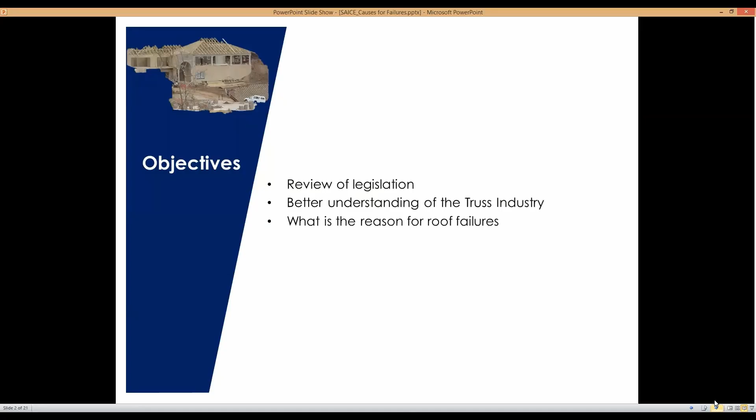So let's just take a look at the objectives that we want to achieve for today. In the first place, quickly a review on the legislation. Secondly, a better understanding of the truss industry. Thirdly, what is the reason for roof failures? Then how to prevent these roof failures. And what is the involvement of SAICE to help preventing these roof failures?

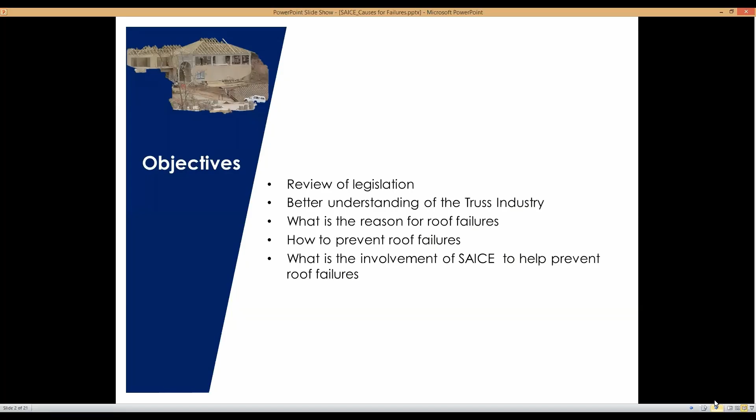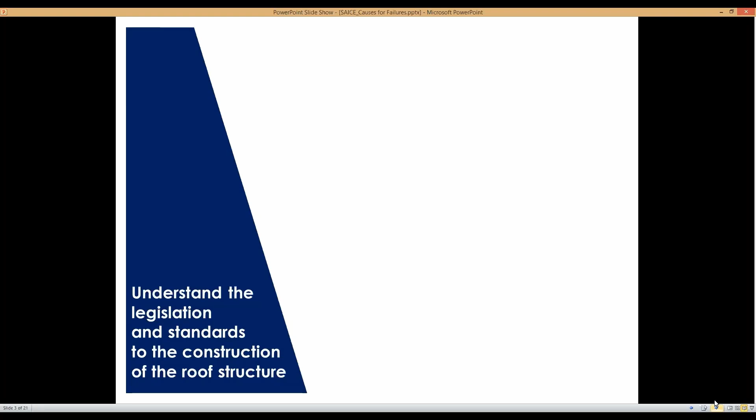Okay, so let's talk a little bit about the legislation. We all know the purpose of legislation is to protect the home builder and to promote uniformity relating to the erection of buildings, and we need to apply it. Really, it's to the benefit of the end user, the person that spent the money. That is to help him and to keep it that he receives a structure, a safe structure, at the end of the day.

So let's first take a look at the first legislation from the Building Act. Any residential house to be built in an area under the jurisdiction of a local authority falls within the scope of the National Building Regulation and the Building Standard Act, and the regulations made in terms of that act. So, in short, if you fall in a municipality area, you need to comply with this regulation, the National Building Regulation.

If it's a homeowner, we all know that in terms of the Housing Consumer Protection Measure Act, all home builders must register with the NHBRC, and all new homes must be enrolled at least 15 days prior to construction. So that's for a residential house.

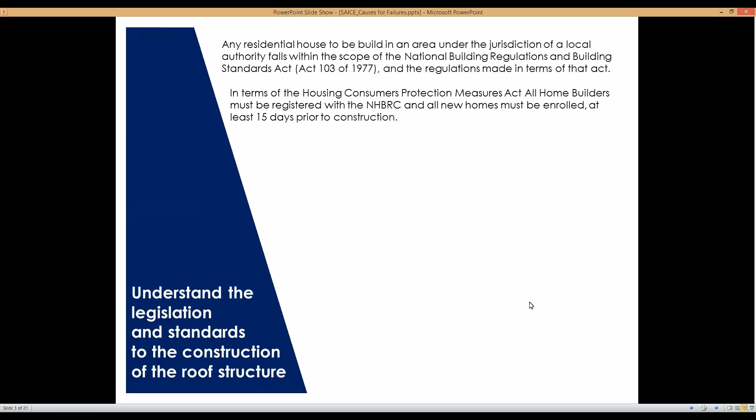The next one that most people overlook, and it's very important, is the Occupational Health and Safety Act, the 2014 construction regulation. This helps because you cannot build a structure and never maintain it. Somebody needs to make sure about it. There's really a rule that you need to comply with the construction regulation.

Many people differ from me, but I did find out and investigate this - the National Regulator for Compulsory Specifications, Rudolf Opperman, did confirm that we need to comply, all structures need to comply. It's not only public buildings that need to comply with this, and not only at the time of construction - it's all over.

If you read through it: inspection of that structure is carried out periodically by a competent person in order to render the structure safe for continued use. B - the inspections contemplated in paragraph A are carried out at least once every 6 months for the first 2 years, and thereafter yearly.

Number 3 - the structure is maintained in such a manner that it remains safe for continued use. And lastly, records of inspections and maintenance are kept and made available on request to an inspector. So if anything happened in that structure and the health and safety guy asks you for these registers, you need to have it at hand.

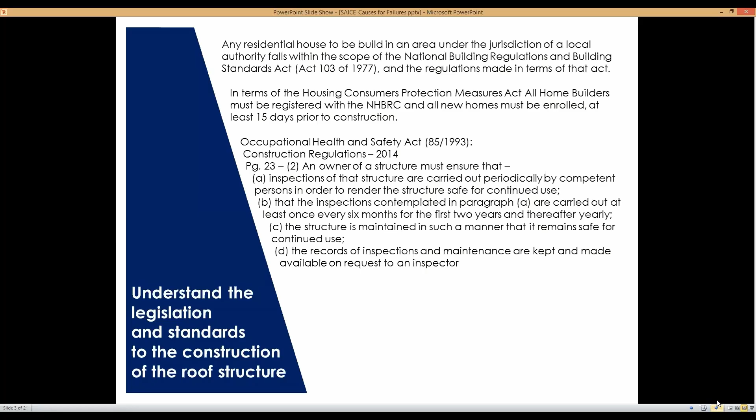Very few people are using this, and this is to help the end user so that the structure stays stable and safe. Let's take a look at the people that regulate and control this.

In the first place, it's your A19 inspection. We now change the focus to the roof structure, and this is why I'm going to refer to roof structures from now on. Your A19 inspections - you need to have an appointed professional person that does these inspections of the roof construction after it's erected.

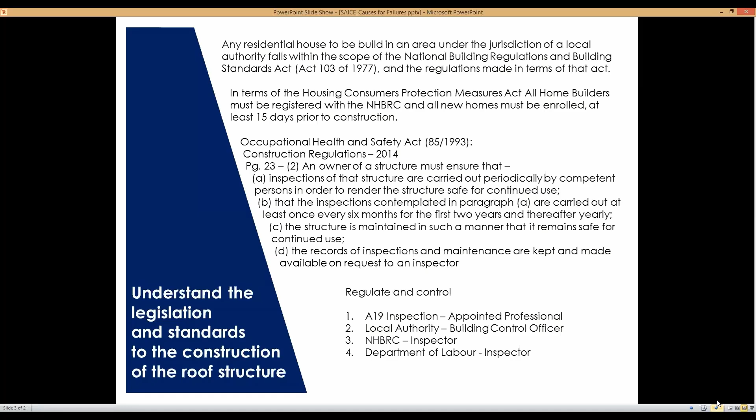Then we go to the local authority. The building control officer has a duty that in his jurisdiction he takes control. Then we go to the NHBRC inspector, and he also has a duty he needs to comply with. Lastly, the Department of Labor inspectors - these guys can get out to your place at any time, specifically your public buildings, and they can ask questions regarding these records.

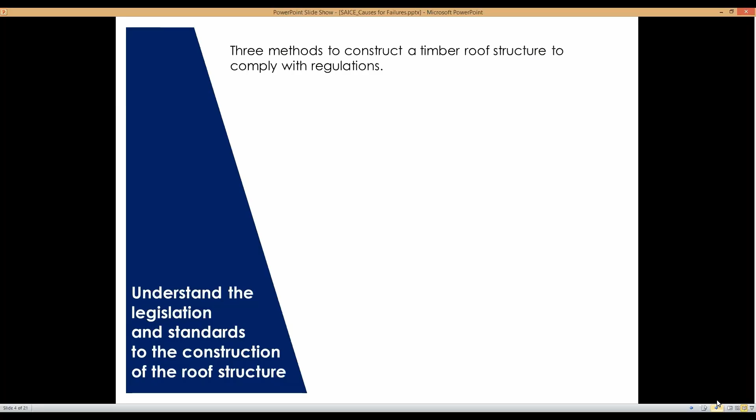Let's take a look - the reason I cover this part is very few people, specifically in our industry, are aware of this. If you want to comply with the building regulation, you only have 3 methods to build a roof structure. It's actually 4, but one is nearly the same as the other. A rational design, or a rational assessment.

If you look in Part A of your National Building Regulation, SANS 10400, they will explain exactly what a rational design is, where you comply to it, and what you do about the rational design. The next one you can use to construct roof structures is the deemed to satisfy in Part L. You've got Table 9 there, and Table 9 will guide you - we'll talk a little more on it later. Lastly is your Agrément certification.

So if you want to construct a roof structure in a municipality area - and many people say, yeah, but a farm or small holding is not part of it - as soon as you start paying taxes, you are part of that municipality and you need to comply with the national building regulation in that area.

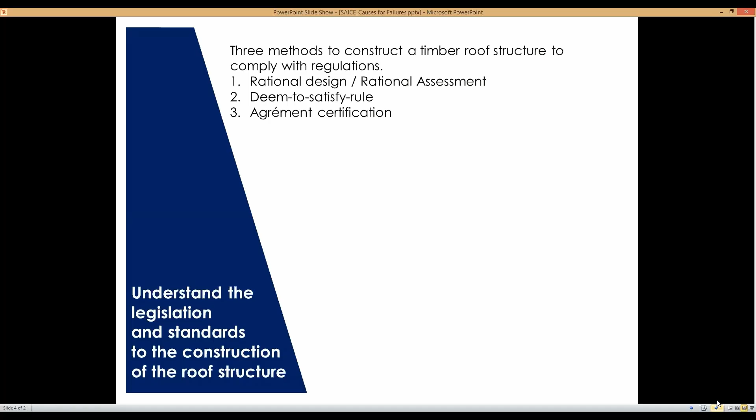Let's take a look at the first one, the rational design. I include two pictures here - one is a prefabricated truss and the other is a hammer beam truss for a post and beam. Both of them are a rational design. Many people are under the impression that only nail-plated trusses, co-planar trusses, are a rational design. But you can design anything - you can design site manufactured trusses, also a rational design.

So you're going to design all the connections, but mainly if we refer to a rational design, we refer to prefabricated trusses by the systems. Okay, let me just quickly take a look, just to give you guys an indication.

If you're not familiar with how the truss industry works, at the moment we've got 3 systems in South Africa. If I refer to a system, I'm talking about a supplier of design software and everything that goes with it - the nail plates they design, the connections, all of that is supplied by that system. They oversee that whole industry in the sense that they train the designers and make sure they follow all the rules. So it's a well-regulated industry. The 3 systems we have at the moment are Unilam, MiTek, and ITS.

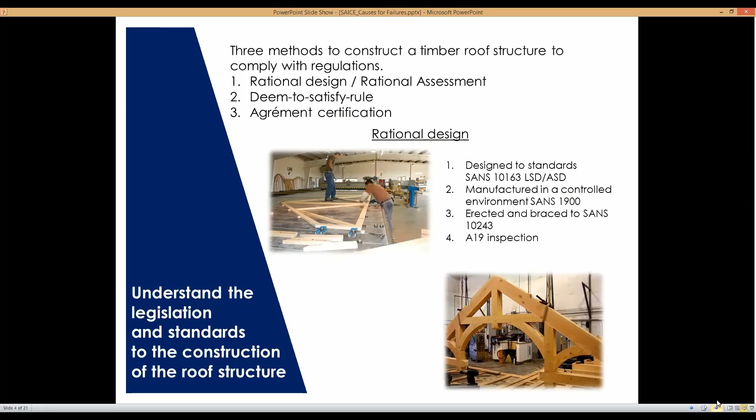So this is the first one we're going to discuss, the rational design. Then we go over to the deemed-to-satisfy rule. This is for self-manufactured trusses, and these trusses are manufactured according to SANS 10400 Part L, Table 9.

The limitations are a lot here. You cannot design a girder - it's a maximum span of 8 meters. There's a specific truss configuration you need to follow, a specific connection detail at all the members. It's a Howe configuration, and they've got a Howe configuration for each of these span differences. So your limitation is 8 meters maximum span, only gable to gable - no hips, no valleys, no girders, nothing.

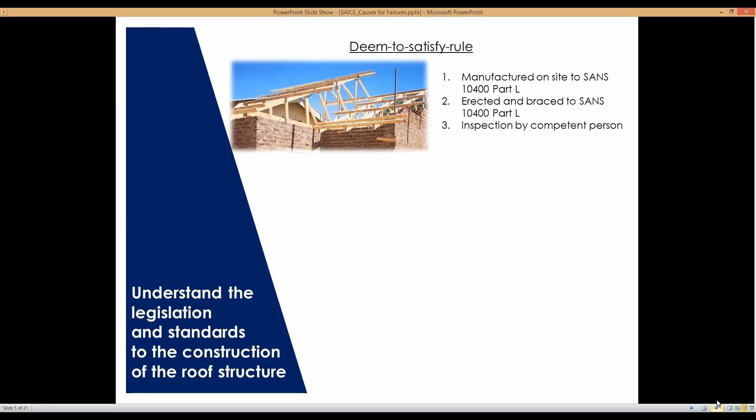At the end of the day, it needs to be inspected by a competent person. So that's your second option for how you can manufacture these trusses. And lastly, you can go to Agrément certification.

This is a certificate that confirms fitness for purpose of a non-standardized product. What I'm using here is the CMA truss, the Concrete Manufacturers Association truss. It's a truss developed specifically for Category 1 buildings. If you look at the detail of this truss and try to rationally design it through the standards, it will not pass. It's been tested by CSIR, and it's specifically designed for Category 1 buildings.

Your deflection limitations are not the same as the others - just a simple example, the deflection. For this truss, all the members in the Fink configuration are 38 by 76s, spaced at 900 spacing, and your battens are 38 by 38, or let's say 36 by 36. Now everybody in the truss industry knows that for a tile roof you cannot space at 900. You can with Saligna, but with pine you cannot, because you're going to get a deflection problem and also a bending strength problem with that spacing.

But for them, it was tested and accepted by the industry, and we all know it's for the RDPs and so on. So it's very strict, also in this design that's controlled. It's not just a matter of manufacturing that truss - there needs to be a specific plate size on it, all the materials, and then you can use it. That's your Agrément certification. You get it a lot on other products too, like your JoJo tanks and all of that.

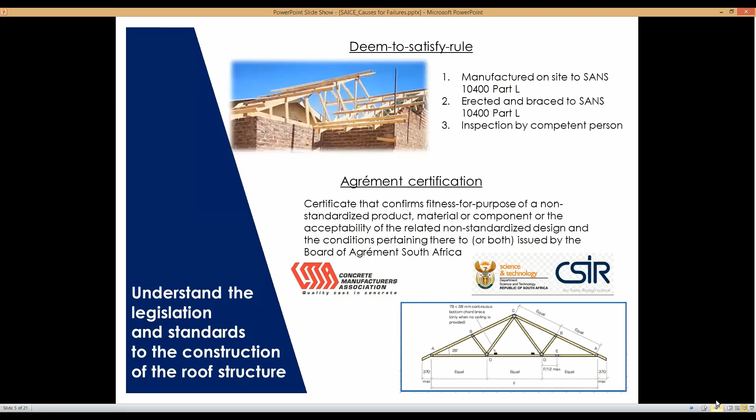Okay, so those are the three ways that you can actually manufacture a truss. That gives us a bit of background if we refer to trusses in the industry.

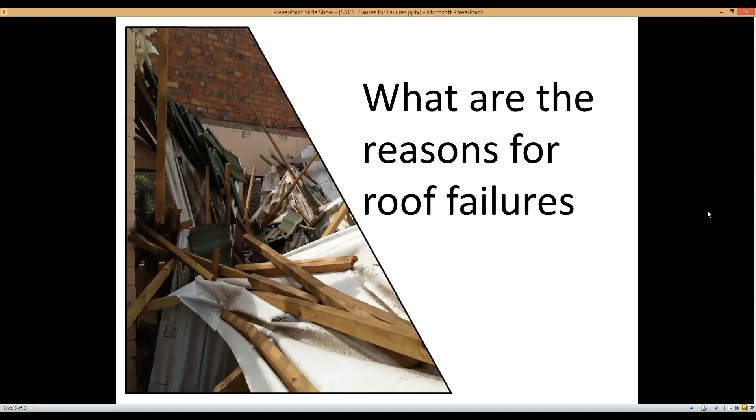Okay, now we go to the next part. What are the reasons for roof failures? We're just going to discuss this generally. We can go in depth, but this is just my view, along with independent roof inspectors who work with me, and we've been in this industry for many years.

The main reason is the application of building regulations and standards. People don't use them. Here I'm referring to professionals, and it's not finger-pointing, but if you decide to start signing for roof structures or design, you need a good understanding of all the standards. You cannot go into this industry otherwise. Unfortunately we have people who sell signatures - I don't like saying this, but that's what happens. They sign and give you a certificate of compliance for R1,000, and they've got no idea. A lot of these assessments show a professional did sign for it, but it's totally undesigned and incorrectly erected on site.

So sometimes I ask myself, did anybody inspect this structure? You're welcome in this industry, but you need to understand all the standards, and work with a truss manufacturer to get background. You need to work with the ITC. There are a lot of sources, but do yourself a favor - don't try signing for timber roof structures if you haven't got an idea how it works.

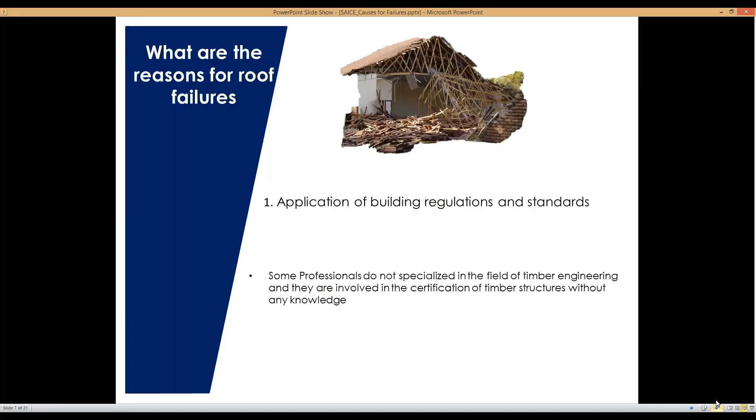Okay, let's go to the next one. Many building departments at local authorities and NHBRC offices are dysfunctional. I don't like saying this either, but it's reality. Specifically in the countryside, in these small villages, the building control officers have no idea about roof trusses. If you put a query through to NHBRC officers, they just say it's job creation. That's not the way it's supposed to be according to all these legislations.

Then we go to the ignorance of the home builder. Unfortunately these people don't get informed by the architect about their responsibility regarding maintenance and maintenance inspections. So they've got no idea - they just accept the builder. If he says it costs this much and the price sounds right, they just use the guy without any background knowledge. That's the kind of experience we get in the countryside. In the metros it's a bit different, but there's also a lack of control at this stage.

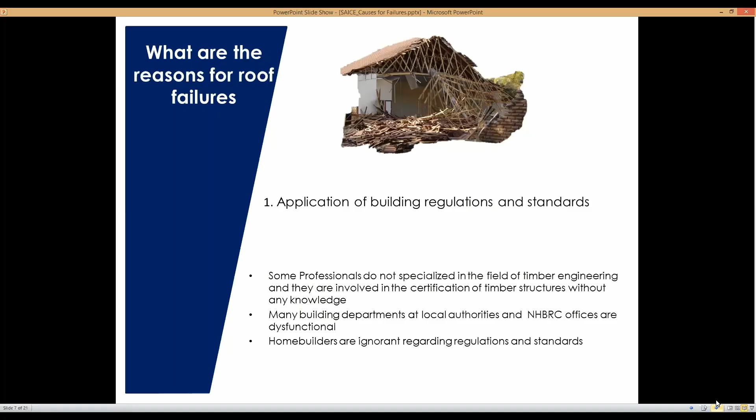That's just my feeling. The next one is a lack of strength in the design - insufficient bracing to secure lateral stability and member stiffness. You can see in these two pictures I include here, it's the same roof - one inside the vault, and the other showing two spans, left side and right side the same span, then the center part where the span increases. You can see one side of the roof structure has nice straight lines, properly braced, while on the other side where the span increases, there's a huge bracing problem.

The main thing we all know is the bracing function is to keep the truss vertical, and most importantly to give lateral stability for your compression members. You can see the lateral deflection on those trusses as we measured was over 300 millimeters, so it's quite a lot. The next thing is your plates will actually pull out of the connections, and then the roof will start to fail.

You can see also at the bottom part where your axial forces are more near your heel. Look at the S shape there and the lateral bending there. It's purely because of bracing.

But keep in mind that the bracing rules for the deemed to satisfied is only up to 8 meters. So if you don't have SANS 10243, please don't sign for anything more than 8 meters, like the Rational Design trusses. A lot of the professionals just accept the plans as is. You need to have knowledge of bracing if you start signing for roof structures. You need to design the bracing yourself without any assistance from the plans.

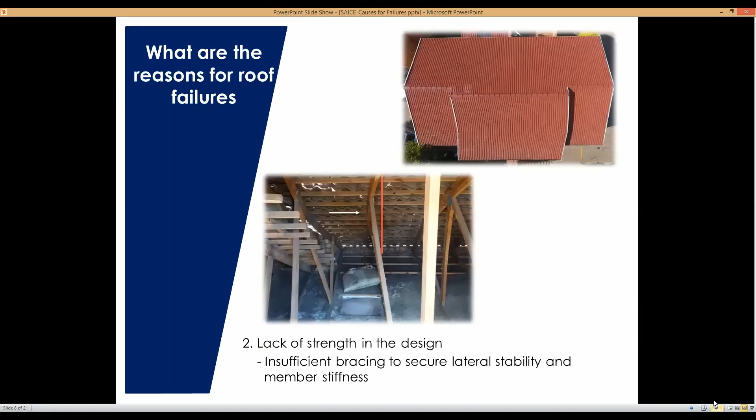I did include 3 slides here for wind uplift. This is a lack of strength in the design, insufficient design strength with respect to environmental actions, in this case wind. You will see on this structure, it's only a part of the structure where the tiles are not on, and the main reason is underlay. It was an extension to a structure, and that part of the structure, the wind blew off the tiles.

Now, the reason why I include this part is very few people understand really what is the function of underlay. The membrane performs a critical function in preventing concrete roof tiles from being uplifted under high wind gust. It virtually eliminates the load on the concrete roof tile when experiencing an imposed uniform pressure difference between the internal roof space and the outside. So in short, the underlay keeps the pressure above the tile and underneath the tile the same, not inside the vault, because that's underneath the underlay. So that's the first function - to keep that pressure the same.

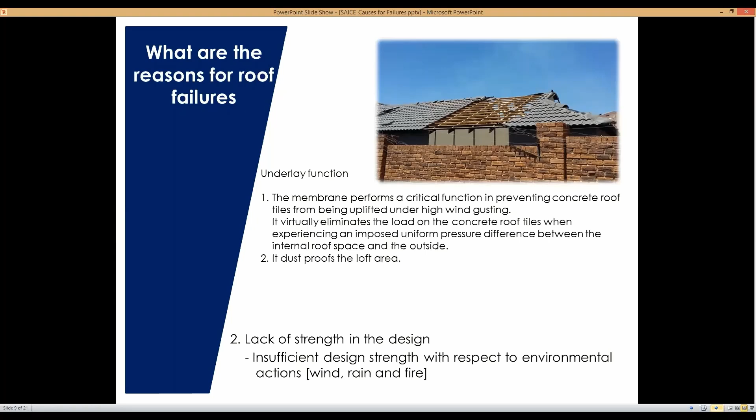Secondly, it dust-proofs the loft area, so you don't get that dust later on the ceiling and on the side of the ceiling, going through the walls and so on. Thirdly, it prevents your condensation runoff - that's another function. And then the last one: suitable for any pitch roof, especially roof applications in hot climate conditions, as it stabilizes UV and heat.

Now, is it compulsory? Yes, it is compulsory. If you look at your supplier, it will tell you it's a requirement for a tile roof between a pitch of 17.5 and 26 degrees, and above 45 degrees. But from experience, I would rather advise you to use it on all pitches - the cost involved is not so much, but the benefit is huge. So this is the first slide, to do with wind and wind forces.

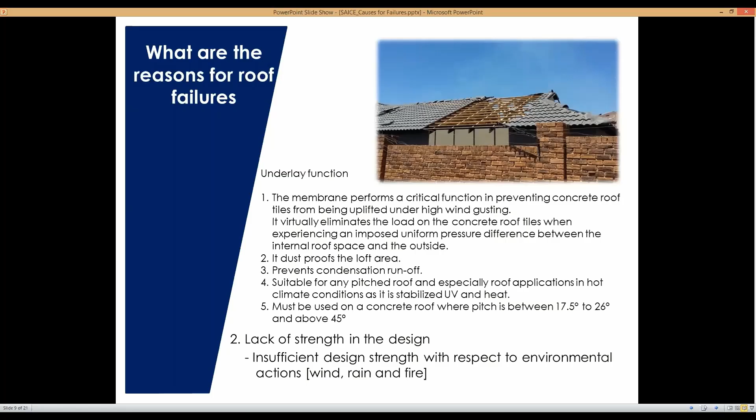The next one - why include this one - is just to show you people that if you look at the picture itself, there's a lot of loose tiles, purely because of wind forces here. There was underlay, but it was a huge wind force, and this is why if you comply to the technical detail of the tile supplier, you will see they've got technical advice on this. Very, very few contractors do this, but it's a requirement.

Only category A, where it's an unexposed area, needs 2 courses and the overhang must be nailed. If you go to category B, semi-exposed, it's 5 courses and the overhang - you can see also in those lines there. In your category C, that's your exposed area, fix all the tiles.

This happened very few times, and this is what I actually want to say: if you are the appointed professional for the job, make sure that you get all this information and make sure that the contractor complies to it. Otherwise, you cannot give that guarantee.

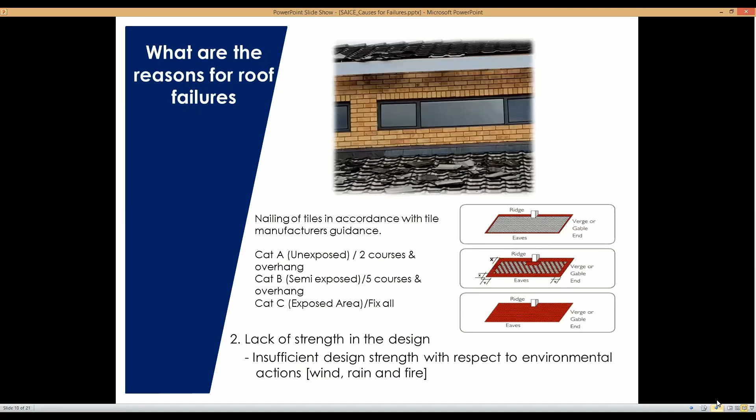Then we go to the last one I want to deal with. The whole roof structure, after the weekend, the wind just uplifted the whole structure with the holding downs and put it next to the building for us. This was purely nothing wrong with the holding down itself; they did use the correct holding down. But the contractor did not close the gables as required, and because he wanted the structure finished as quickly as possible, they left it open for the weekend. A day later, the whole roof was blown off and on the ground.

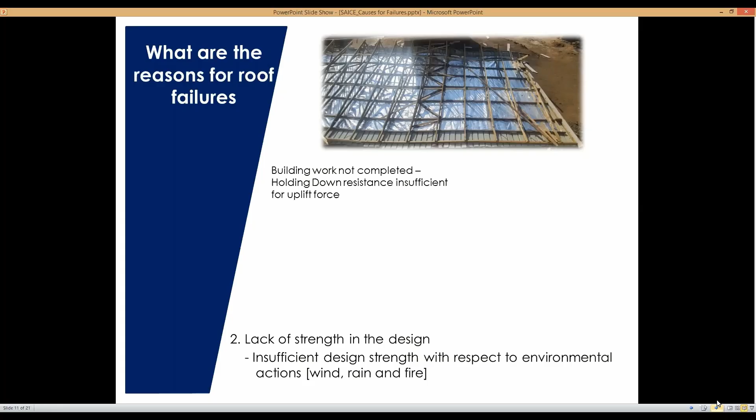Just to give a bit of perspective about a sheeted roof versus a tile roof: if you talk about a tile roof, remember it's a heavy load. We normally refer to it as a bag of cement every square meter above your head, which gives a good indication since the guys know the weight of a bag of cement. As soon as you deal with a sheeted roof, you work with an umbrella effect, so you need to keep it tied to the superstructure the whole time, and that's why your holding downs need to be done properly.

Please be aware that you cannot use wire for a sheeted roof. In Part K, it's nicely explained what thickness of holding down you need to use, how deep into the superstructure you need to bind it, and all of that. So please, always remember your inspector cannot inspect the holding down for you. You will say, yeah, it's incorrect.

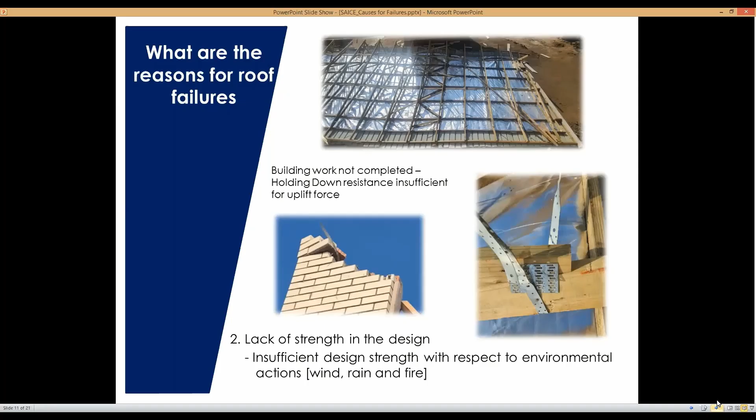Let's say, for instance, they did use wire for a sheeted roof. The inspector will say to you it's the incorrect one. But still, if you look at this certification, we said clearly that we don't take responsibility for the holding down because we haven't got laser eyes to look inside the superstructure. So that is the responsibility of the appointed engineer for the project.

Then we go to the next two — this is the bad stuff. At the stage that the roof inspector or the appointed engineer does the roof inspection, there's no loading on it yet. It's just a structure with all the battens, all the purlins, with the bracing 100% correct.

And he gives approval, and then they start loading the roof. So he's no longer involved, and you don't know where they're going to place the solar geysers or the PV panels or all of that. Just keep in mind, the appointed engineer needs to make sure that if it was not specified exactly where they're going to place the solar geyser on the architect's drawing, those trusses still need to be designed to take that load.

The main thing to keep in mind, people, is this is reality, not only due to Eskom's performance. If you read SANS 204, it specifies that only 50% of your water heating supply can be from electricity — the other 50% needs to be from solar, gas, heat pumps, or another way. So just keep in mind that solar units are the reality; they're going to be on all the structures.

The big problem here, from my side, is that these solar suppliers just put it on the roofs of old structures without checking. Some of this stuff is heavy — we talk about 400 kilograms over 3 or 4 trusses. If you apply that load to those trusses afterward and reanalyze it, you'll see it's totally under-designed. So you need to make a plan there afterwards, but that only happens after the fact.

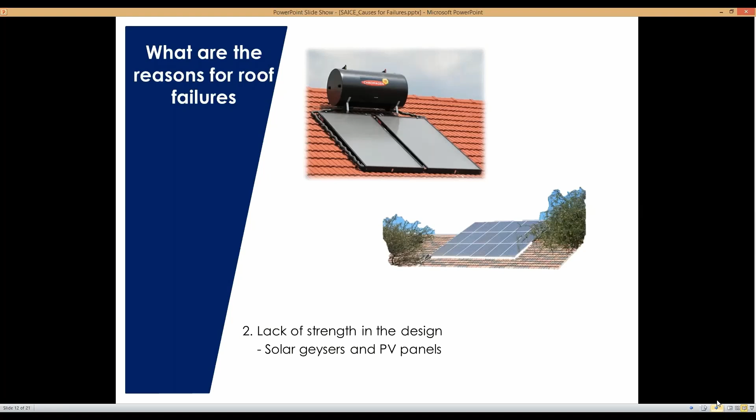Another reason for failures is a lack of strength in the design of self-manufactured trusses. If you refer to a prefabricated truss or deemed-to-satisfy truss in accordance with SANS 10400 part L table 9, it's only an 8-meter span, no girders, no hips, nothing like that. They specify the pitch, the span, the truss spacing, truss configuration, and method of connections.

All of that is specified there, and you need to adhere strictly to it. Then it's acceptable. But in this case, this is exactly what I'm talking about in the countryside. This is one in our small village that I did, that Pyman helped me with. The NHBRC just let this happen. You can see there's no triangulation in the trusses. Look at the deflection, and they load specific areas of it. You'll see on another picture at the end where I show you how the structure looks from the outside.

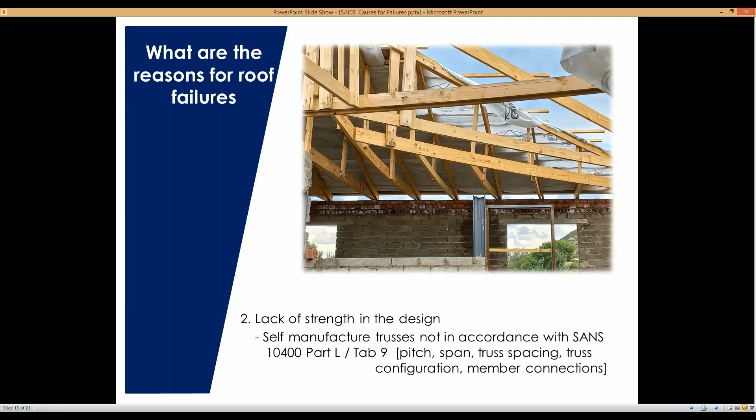It's actually a nightmare if you see stuff like this, because it's like a timing bomb that just waits for something to happen. And then you need to convince people staying inside it that it's just going to collapse totally and fall on your head and you're going to die. But this is our problem that we have due to municipalities that don't do their jobs.

Okay, mistakes during the truss fabrication stage later have an influence on the stability of the truss. People make a mistake with the timber size and the grade. It's not a big influence, but if you talk about girders with prefabricated trusses, they used maybe a grade 5 instead of a grade 7. They overlook that part.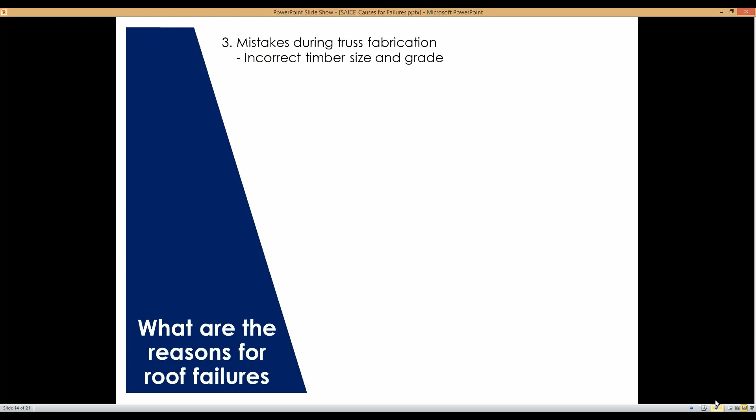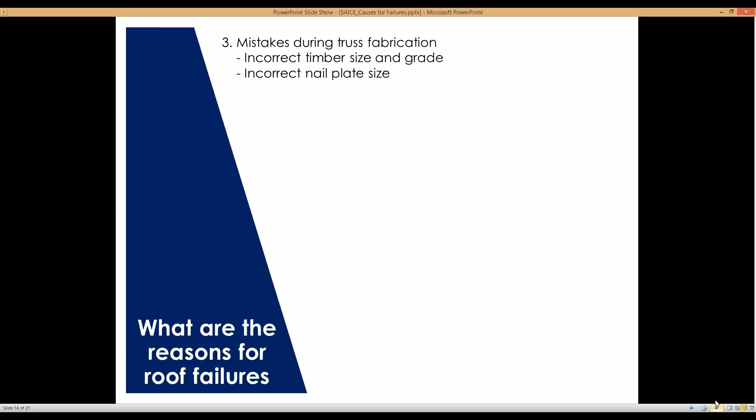And then the next one, they use incorrect plate sizes. Maybe they did not have it in stock, and somewhere it slips through the control measures. So it can happen that you get to site where there's only a plate on one side, or two small plates, so it cannot transfer those axial forces and that bending through that area.

Then we go to the next part, truss configuration and connection details of self-manufactured trusses. It's like that previous picture I showed you, people. We have problems with it. People don't adhere to the regulation of deemed-to-satisfy, and they just build what they like. We really have a problem across the country about this, because you go to the municipalities, you go to the NHBRC, and the NHBRC just tells you it's job creation. That's not their duty, just to give job creation. They're 100% allowed to do that, but according to the legislation.

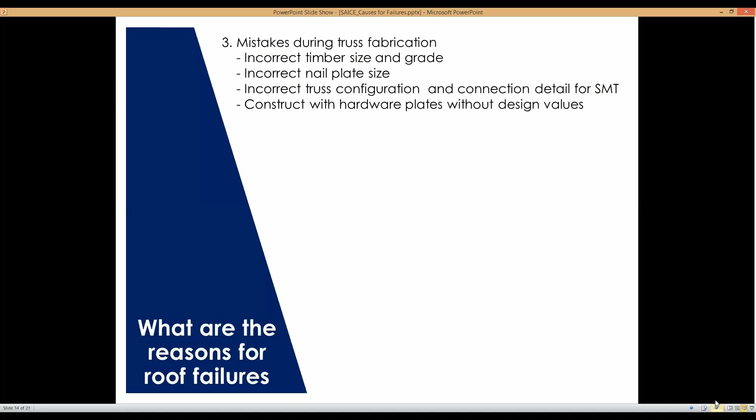Oh, this is the bad one. Constructed with hardware plates with no design values. From my side, I wonder why they ever allow a nail plate in hardware stores, because there's no design values to it. So what the contractor does, he just goes there, buys the reasonable priced plate, and he just nails it. You can see on those plates there, it's only on one side.

I can show you some pictures here, and I can show you some roofs that came down due to these hardware plates. This is why, to be honest with you, I cannot believe they sell this stuff in hardware stores, because it's like selling a nail that can't do the job. These people buy anything just to manufacture a coplanar truss, but it's totally under-designed. It's just a mess, to be honest with you.

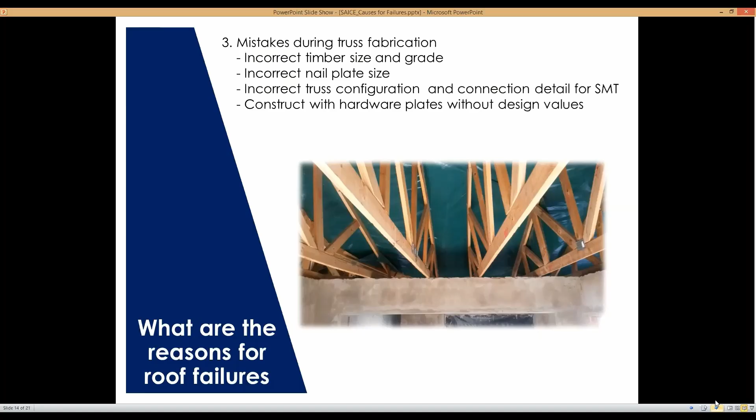Okay, what are the reasons for failures? Now let's take a look at mistakes during the construction phase. You can see in this picture, the other one was on the inside. Can you see here, the superstructure already failed. They tried to prop it and rectify it, but it's a nightmare. It's in our small village, the pitch is too low. Everything that's wrong is in this structure on the inside.

Okay, insufficient construction drawings. Here we go to the prefabricated trusses and contractors that haven't got all the drawings that they're supposed to have on site, so the brace bays is not constructed in the correct place.

They did not use internal supports, or they did use internal supports where they're not supposed to. Then later on, some members start failing because the whole configuration is wrong. Members that are supposed to be in tension, according to the design, are now all of a sudden in compression, without some lateral stability.

So this is also a reason. Then your hip connections and your bracing details are not on site, so you get an end result that's not correct. If you're the appointed professional or roof inspector who's supposed to sign off on that, and you don't get all this information, you need to make the contractor aware of it and make sure they comply. They must construct it exactly according to design, with all the brace bays at the specific place, because that's how the design complied to the standards.

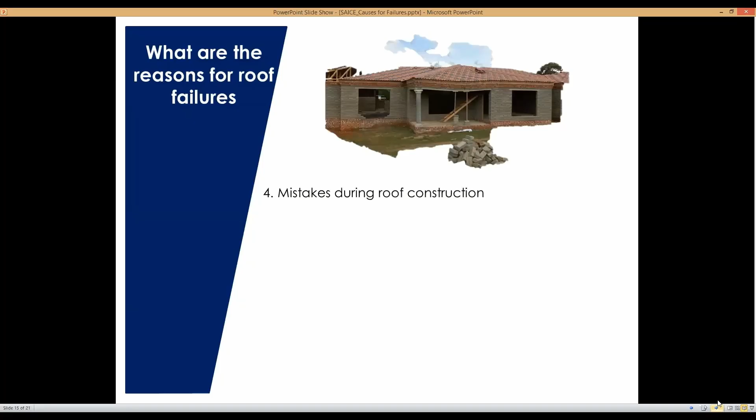As I say, this is exactly the same building from the outside, and we're going to discuss mistakes during the roof construction stage. In the first place, as we said earlier - maybe you didn't hear it - it's insufficient construction drawings that people receive on site, so the contractor or roof erector uses a lot of his own skill to do it.

The danger is that brace bays need to be exactly in a specific place, because that's an assumption that the software uses for the design of these trusses. Sometimes people use internal supports where they're not supposed to, and then your configuration, or the forces through your members, change totally.

Then you get issues with your hip connections and bracing details - insufficient construction drawings on site. Sometimes it happens that people did not deliver it, or somebody didn't give it to the roof erector. So we just need to make sure about that, but sometimes it can be a reason.

Okay, roof erectors do not understand the roof layout drawings. This is why I say roof manufacturers need to spend time with the local roof erectors and advise them. If you see a site where they're busy specifically with trusses that you supply, spend time with the roof erector and guide them, because many times the roof fails due to incorrect construction methods or incorrect placement of bracing.

So that can happen. Then we go to poor principles during construction with unskilled labor. Unfortunately we have a labor problem in our country - a lot of them are unskilled, these people just try to survive and get a bit of money, so they buy themselves a saw and a level and start constructing roof trusses. We need to guide them and use the opportunity to make an upliftment, to get skilled labor at the end of the day.

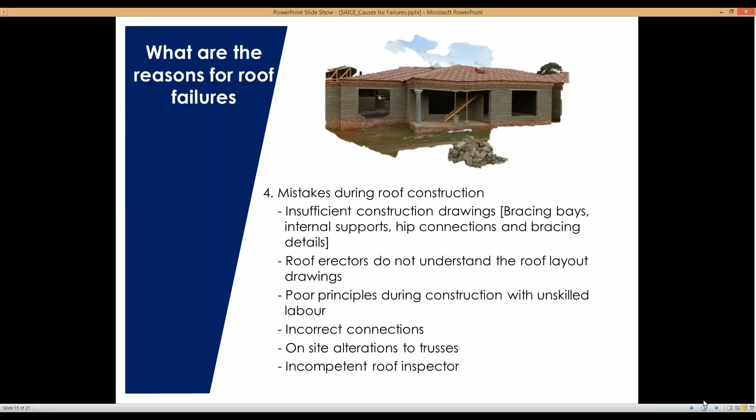The next thing is material failure and connection failure. Then there's roof leakages, specifically on these old houses with sheeted roofs where the lead screws nailed in with lead washers are no longer working. There's no maintenance, and as soon as you get into the roof, due to a lot of leakages inside, you discover that nearly all the purlins are rotten. After the rotting of the purlins, it's going to be the rafters next, and at the end of the day we're going to replace the roof structure. The main reason the roof structure is still standing is that the sheets are 0.8 millimeter thick and can stand on their own. You don't even need that; if the walls can uphold that horizontal force, it will stay there forever.

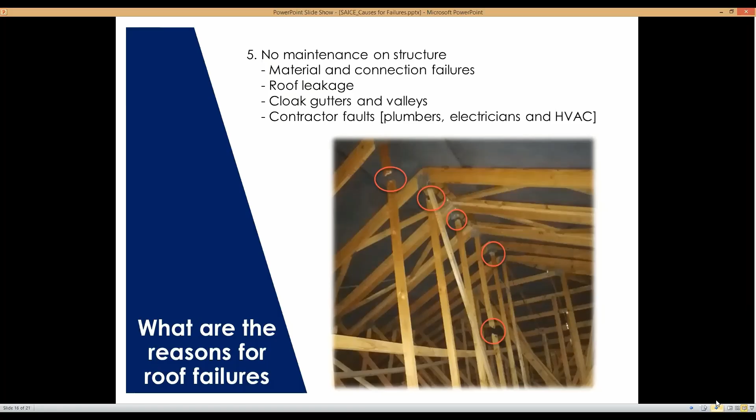If we were aware of it, we can rectify it. But if you only start seeing it afterwards, when you get that deflection in the roof from the outside, it's already gone so far that you cannot rectify the problem with remedials. So how do we prevent these roof failures? In the first place, good cooperation between the municipalities, NHBRC, and the Department of Labor, and the application of the building regulations. That's the main important thing.

Sorry, I'm just going back to this point. Remember, people that work for these departments are liable. So we need to keep them liable, because unfortunately, the building industry gets a bad name due to the way these people are conducting their jobs. So we need to make sure that you keep them liable for that.

Then we go to the architects, who need to educate homeowners on the application of the building regulations and the maintenance of the structure to secure a safe building. Sometimes the architect doesn't need to appoint an engineer. Everything regarding the construction and the structure falls under deemed-to-satisfy rules. So it's not a rational design - maybe it's just an 8-meter span, gable to gable, and the soil is such that you can use the codes to design the foundation. So there's no engineer involved.

So the architect's got a huge responsibility to inform the owner regarding maintenance and all of that. So if we have the opportunity, of course, we need to do it. And you also need to supply not just registration, but a maintenance guidance.

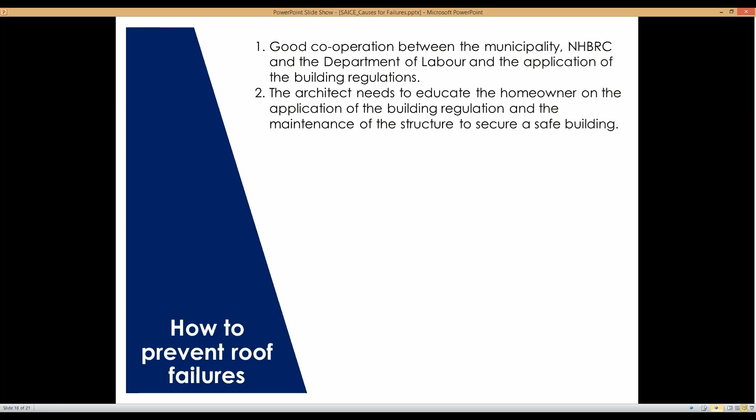Just a small example: when you get to places and the person's got a Chromadek structure, they say, oh, I don't have a problem, I've got a 15-year guarantee. And I said to the person, you're supposed to read through all the technical documentation - you're supposed to wash these Chromadek roofs once a year. Are you aware of it? Otherwise, you're going to lose your guarantee. And the guy said, oh sure, I was not aware of it. But I'm just telling you all this - you need to comply with the technical guidance of the supplier to keep your guarantee.

The next one: workshops on the design and construction of timber roof trusses need to be promoted to professionals, inspectors, and builders. And then the tertiary training institutions should include the design and construction of wooden trusses in their syllabus for timber engineering.

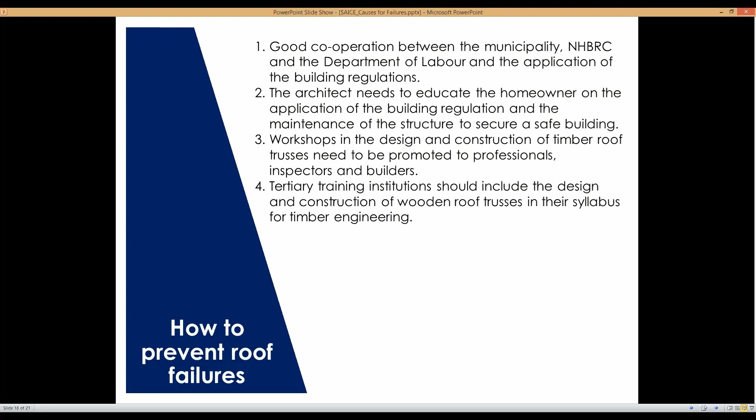I know a lot of these tertiary institutions teach you how to design a joist, for instance, and I know Prof. Walter Birdsey has a passion for this industry and is still involved at Unilam. I know he spends time with his students there, but I feel we need to go a step further in explaining to the students and guiding them through a part of the syllabus on roof structure construction, plus erection, plus bracing. There's quite a lot involved, but if we include it, we'll have a benefit over the long run.

Okay, I see Marius Visagie has a question. I've got one here - maybe you can go to the others, but let's just deal with Marius' question first.

Marius asks: as an engineer, we need to supply a Form 4 to local authorities, but no design and supply company of trusses will supply us with Form 3, and I have a big problem with this.

Okay Marius, from my side, what we can do - I'll take it up with Prof. Walter Birdsey of Unilam and also with the ITC. I know they ask us, and that's why I put myself apart in Form 4, stating that I only take responsibility for the roof construction in accordance with the drawings that were supplied, because that's what you're actually doing. You cannot take responsibility for the design - the system takes responsibility for the design, not you at all. But let me talk to them. Marius, you're welcome to ask Debbie for my email address. Send me a mail and I will assist you with that, and we'll get to the end of it - you'll get all the assistance from my side and also from the systems. Hopefully that's okay for you.

All right Ans, there's quite a few questions from the start which I think you may have lost on your side. I can go through them.